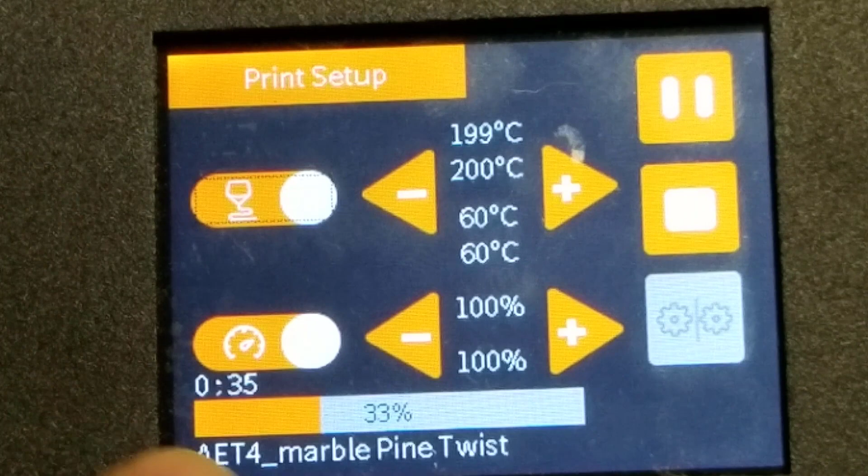If you drop it in too early, you'd have troubles with collisions. So it's good to wait to at least 30% so it'll sink down in and the project can complete without running into the marble or whatever cool shape you decide to add. You could also, as it got taller, add more marbles, which is something I may explore later.

Alright friends, so here we are in Tinkercad. This is a copy of Pineapple Twist. You guys can get your own one of these. If you type Pineapple Twist and click search, if it doesn't show up in the main ones, instead of sorting by likes, you can quickly hit latest, and mine should be somewhere.

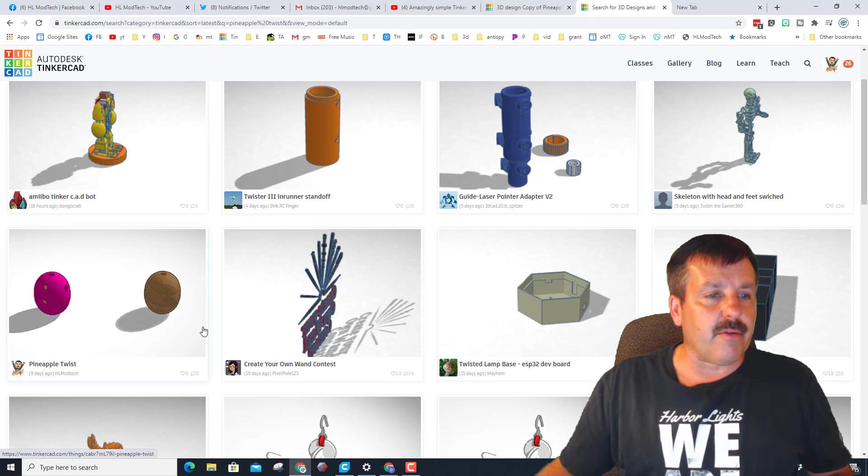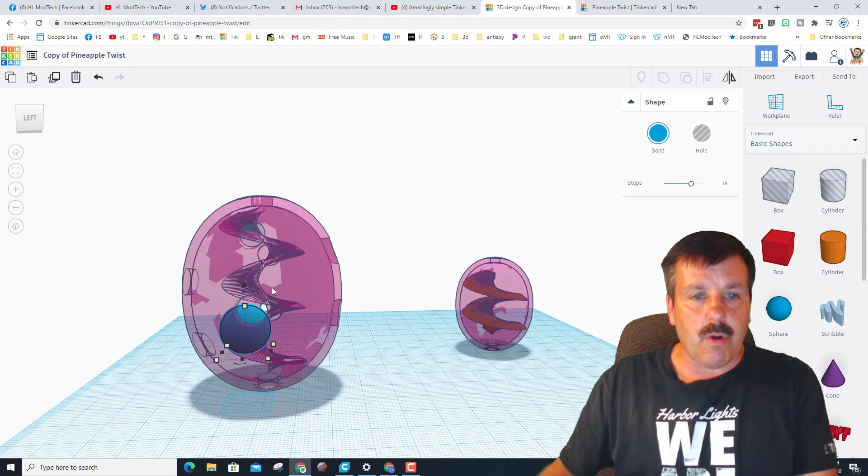So all I did is take the original design, unlock everything, and I'll do that again right now, make sure nothing is locked. Then I held down shift and had it grow. I'm going to hide this little piece right now because I don't want to grow the sphere. If you hold shift, it grows in every direction.

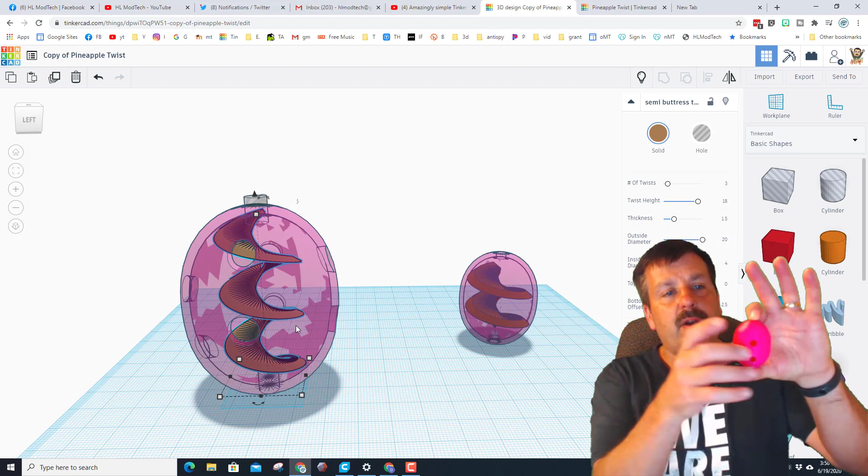Once I did that, I unlocked or ungrouped these parts, took this inside one, and adjusted it so it did a different number of twists and reached out where I wanted. I kind of like the way this one turned out. I'm sort of happy, but I'm not going to put this on Thingiverse yet because I just don't think it's perfect.

I want to print it clear so it moves exactly the way I want. But I want you to know, hey, it's out there. If you guys want to make one faster than me, game on. The first one to make the awesome one is the winner in my book.

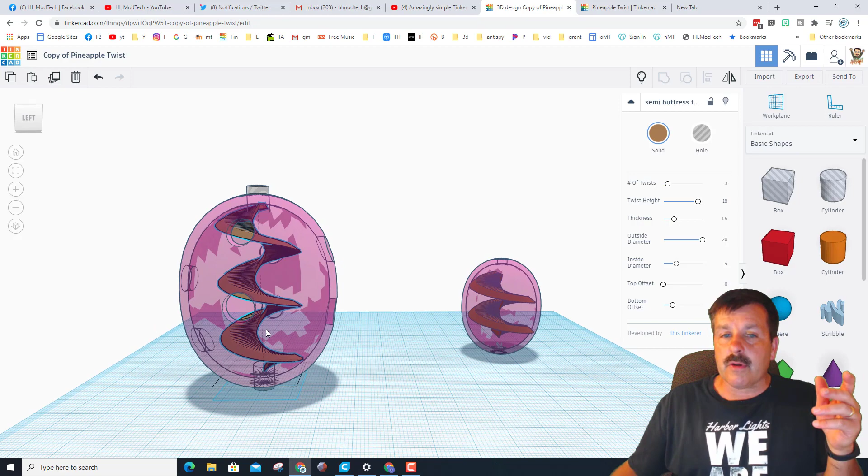Things I noted from what I built: I did not come all the way out to the edge because I didn't think the sphere needed it. I'm questioning now whether that was a smart choice or not. I also took the brown thing in the middle and made it thinner on the new version, going from 2 to 1.5. You can't go past that outside diameter, so that's something to consider.

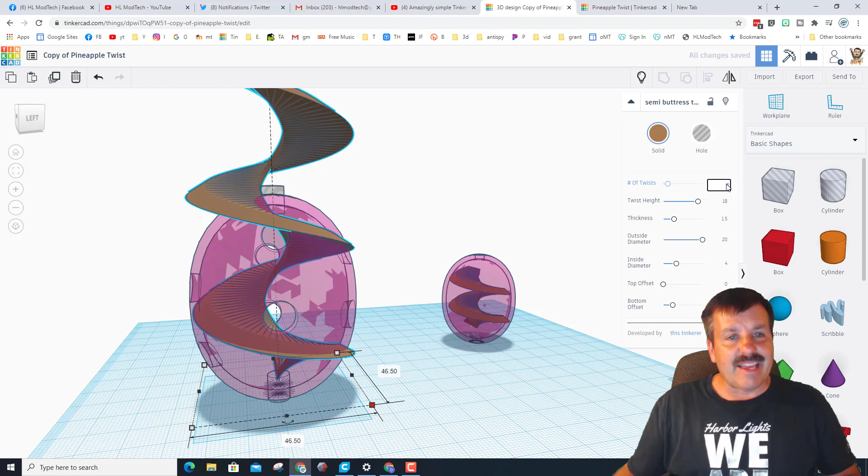If we want it bigger, I'm going to do Alt Shift and show you this. We can grow it so it's wider, but then it's going to mess up the twist. Those are things you can play with to make it exactly the way you want. If I do Alt Shift now, I can squeeze it in closer, drop it down to the bottom. There are lots of ways we can vary this to make it as incredible as we want as we move toward our awesome Pineapple Twist marble run.

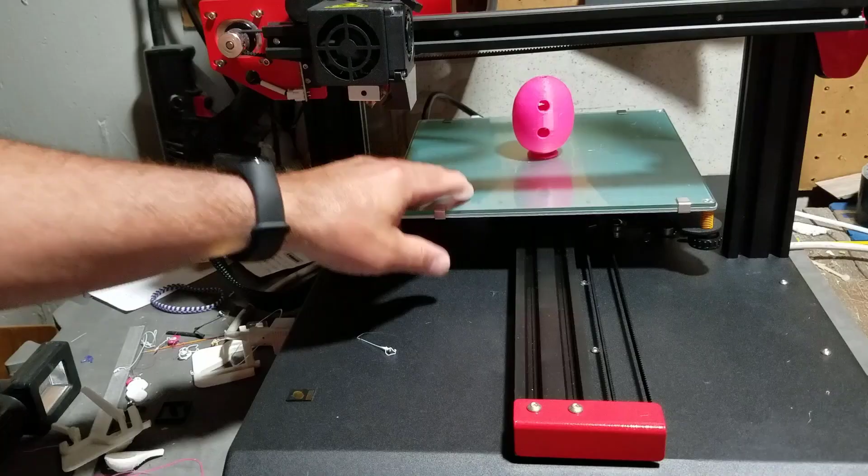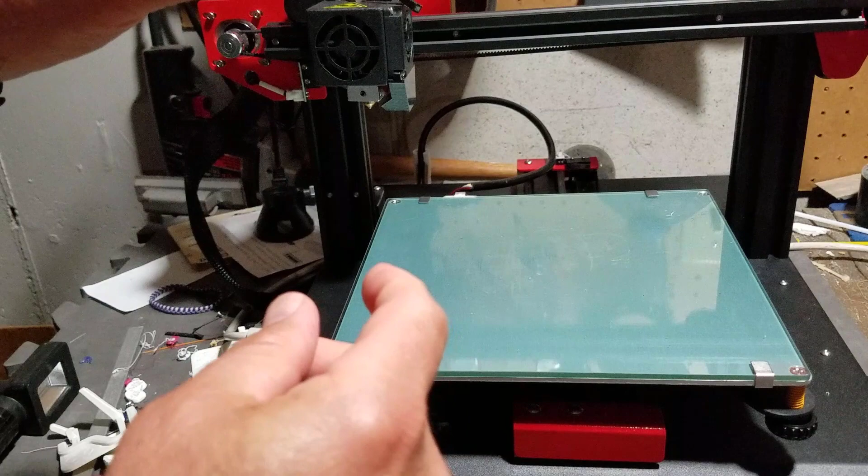Alright friends, so it is 2 hours later. Let's see what we made. Peel off the raft. There, you can see it's hollow inside, and when we flip it around, the marble goes from end to end.

It may not be the most incredible thing I've ever created, but it was super fun and I'm looking forward to playing with it some more. I wish I had transparent filament because I think that'd look pretty sweet. Maybe I'll try to light it up as well, see what it'd look like with an LED inside there. Since it's a Tinkercad file, you guys can adjust it and make it even cooler on your own.